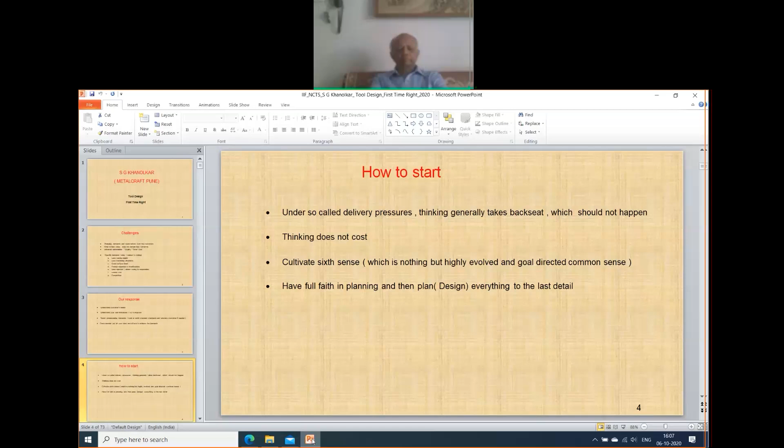Now we are talking about tooling design, first time right. Today, everybody's patience has become so thin that the moment you get the order, the customer wants the casting, and that too with all possible deliverables, that is in the fastest possible time, best possible quality, and least cost. How do we achieve this? We can achieve this only if we think before we act. What are the challenges involved in this?

Everybody knows universal deliverables are quality, time, and cost. I tell in our company, interdepartmentally also, every department has to take into account that whatever he delivers to his next processing agency, whether it is quality, whether it is delivered in time, and at what cost. Now, same applies to foundry tooling also.

If we look at the customers' demands on castings today, they want least possible weight for a given geometry, minimum possible machining allowance, excellent surface finish, prompt response to modifications, less rejections or no rejection, and of course less cost.

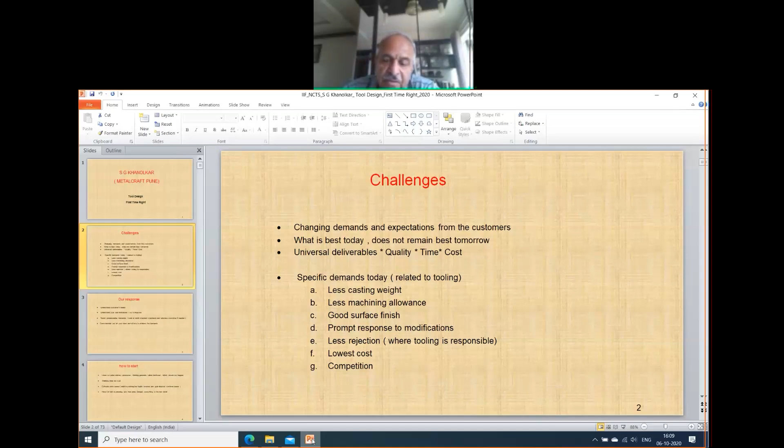Today, all three deliverables are needed simultaneously, which makes it more important to do everything right for the first time. What should be our response when the customer, management, individuals, or the organization want something right for the first time? Our response should be to understand the customer's needs.

Customers spell out their requirements through their drawings, through their dimensional or volumetric requirements, through their 3D models, through various documents, through various standards drafted by such companies. Many times I've seen people making a pattern halfway through and then receiving some standard document drafted by a big American or European company, and then everybody starts trying to understand what that document means. So it's very important to understand customers' needs before we really start to work.

It's also more important to understand our own limitations. There's no point in having dreams of reaching the moon even before we start using automobiles.

Resist unreasonable demands. The drawings and customers can ask for anything, but the foundry has to really understand and assess what is possible at their end, what is possible at any foundry's end, and then insist on removing the unreasonable demands.

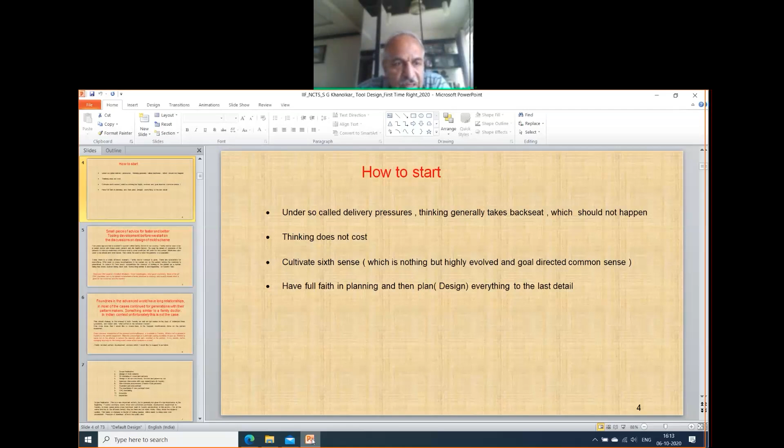Have full faith in planning and then plan everything to the last detail. Before we go to the theoretical part of my presentation, let me give you a small piece of advice for faster and better tooling development before we start on the discussions on design of mold scheme.

Mold scheme, if properly designed, will ensure in most of the cases you deliver the right product right the first time. Few years ago, we had a wonderful system called family doctors in our country.

Family doctor used to be a senior doctor who knew every patient and his health history. He used to be aware of response of his patients to various medications and knew exactly what medicine will work for his patient. Medicines also used to be simple and time tested. Very rarely, he used to refer his patients to a specialist.

Today, there is a totally different scenario. Family doctor concept is gone. There are specialists for everything who need so many investigations to be carried out on the patient before the medicine is prescribed. In today's high-tech world, somewhere the concept of looking at the patient as a human being has slowly started taking a backseat.

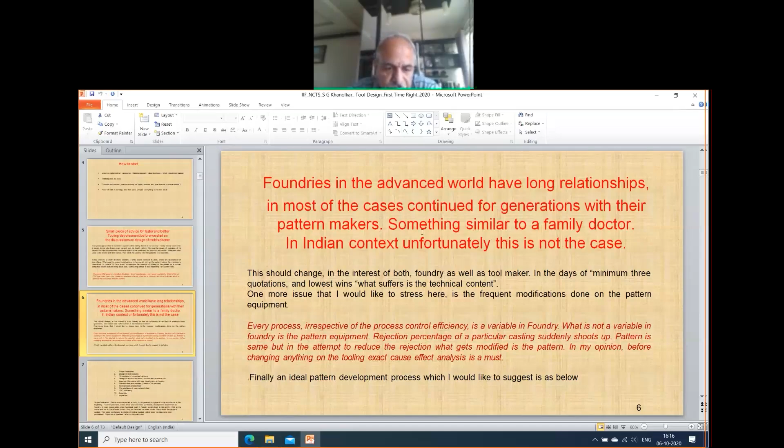Finally, an ideal pattern development process which I would like to suggest is as below. So, as I mentioned briefly in my last lecture, the process or the number of steps should be like scope finalization, where we understand our own limitations, we understand customers' requirements, and then decide about the scope, what will be delivered and how. Then starts the design of mold scheme.

Once it is over, 3D modeling, of course, is now a much easier task as compared to what we used to do in earlier days. Then design of actual core boxes, fixtures, patterns. At this, the next point is approval and discussions with user departments in Foundry.

I would say that this is the most important point because this brings everybody on board. If all such designs are discussed with users or at least user department heads, then the reservations, if any, are brought forward right in the beginning, and it's much easier to make the tooling acceptable or liked by the user departments. Then raw material procurement, standard part procurement, pre-machining, CNC machining, assembly and inspection.

Let us talk about scope finalization. This is a very important activity, but is generally not given its due importance in the beginning. Foundry purchase, sometimes end customers purchaser, development department in Foundry. In many cases, entire cross-functional team in Foundry are involved in this activity.

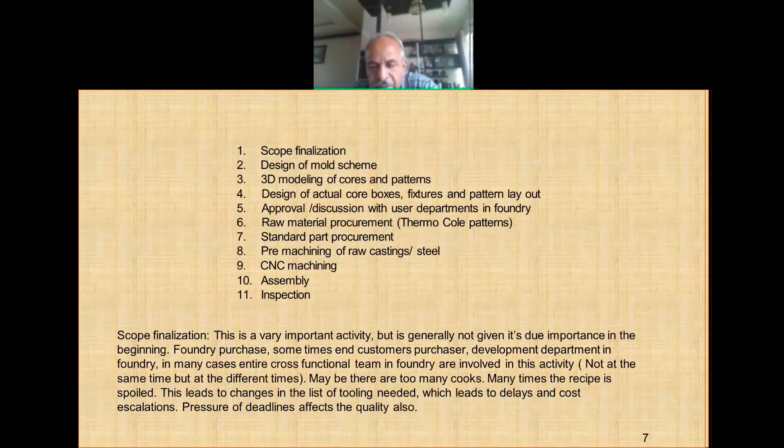Unfortunately, my observation is not at the same time, but at different times. Maybe there are too many cooks. Many times the recipe is spoiled. This leads to changes in the list of tooling needed, which leads to delays and cost escalations. Pressures of deadlines affects the quality also.

So we have to take into account all these issues and then proceed. First, make a list of tooling: correct definition of tool material, number of cavities, how many we would like to produce from our mold, and what combination of cores in the core boxes.

While deciding this, one has to take into account core flow in the core shop. If there are any assembly cores, they should be produced near the main core so that getting it there and testing it is much easier. Also consider availability of core shooters and their capacity.

Review of special casting tolerances and special gauging needed to achieve them. Small effort in the beginning to decide the exact scope of tooling will lead to macro benefits in the overall tool life cycle. It must involve all concerned, including production departments, from the beginning.

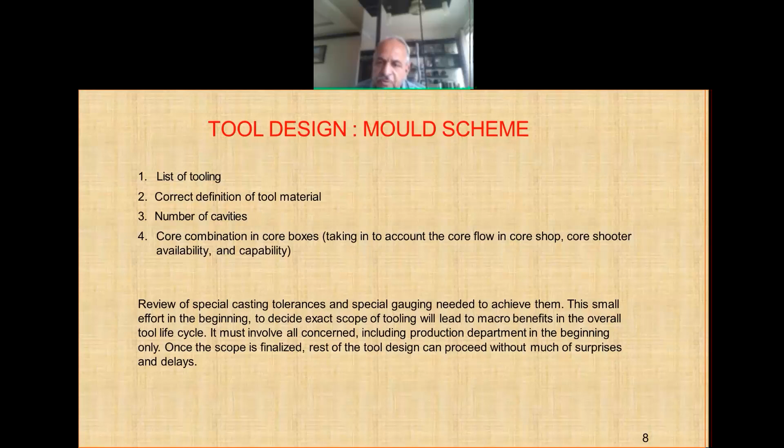Once the scope is finalized, the rest of the tool design can proceed without much surprises and delays. Once this document is finalized, it can be given to any tool maker, machinist, or machining expert, where the foundry's active interaction may not be necessary.

Now let us talk about mold scheme in detail. Mold scheme is a document which outlines how a casting is processed in foundry. It also acts as a starting point in the tooling development cycle. It is a bridge between foundry and pattern maker.

The objective of mold scheme, in simple words, is to produce a good casting in the most economic way. Mold scheme designer requires thorough knowledge of practices followed in the foundry for which the tooling is to be manufactured. It also means that a good mold scheme for foundry A may not be as good for foundry B.

So there's no point in copying what somebody else has done, or taking somebody else's tooling and trying to produce the casting in a different foundry. If at a mold scheme design stage all areas related to casting making are properly addressed, it saves a lot of trial and error type of rework at a later stage.

As mold scheme is also a form of tooling, all basic principles applicable to any good tooling apply to mold scheme, in addition to foundry specific considerations. Most of the activities in engineering industries, such as machining or assembly, involve much less variables as compared to variables involved in foundry. Considerations that should go into design of a mold scheme can be classified into following groups.

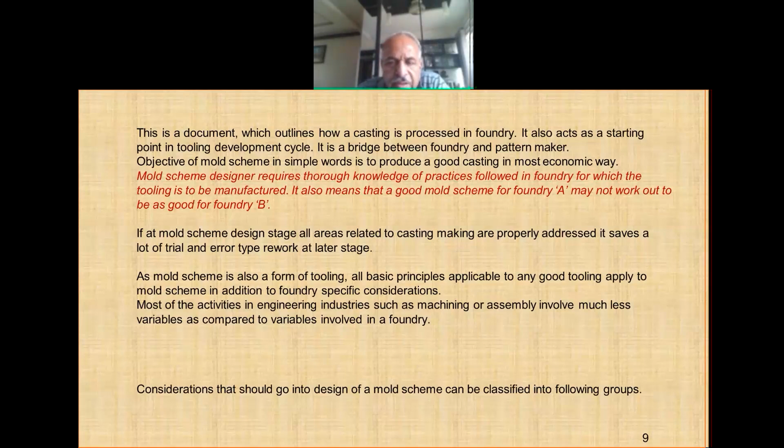Many big companies have their own standards, and these standards are generally derived from, or are derivatives of, ISO 8062, which serves as a guide to supply and acceptance norms of the casting.

The tolerance achievable on a dimension is a function of the foundry process and that dimension itself. A smaller dimension will have much less tolerance compared to a large dimension. A casting made in hand molding type of setup will have a different standard of casting acceptance as compared to a high pressure molding line.

Common understanding and proper interpretation of these standards is very important, and it should be arrived at in the beginning. Here, there has to be insistence from the mold scheme designer on the purchase department that acceptance standards of the customer, along with the customer's drawing, should be made available. In fact, I would suggest that before accepting any order from any customer, these standards must be thoroughly understood and studied.

If demand from the customer exceeds tolerances achievable as mentioned in the standards, additional in-process checks might be needed to control the normal process variation. These checks may be in the form of additional core assembly fixtures, templates, gauges to check particular dimensions, special care in fettling, and additional casting checking fixtures.

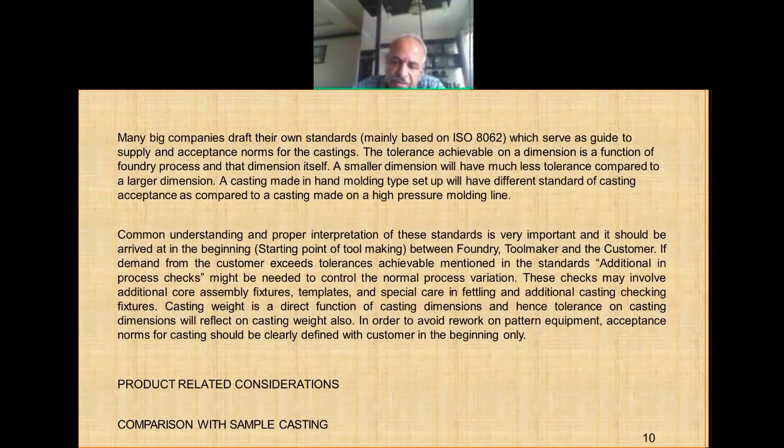Sample casting is a great information source, and it must be referred to before starting mold scheme design. All possible attempts should be made to get the sample casting if it is available, as it is an important source of information.

Sample casting in most of the cases gives vital clues which help in taking the right decision the first time. However, one should not get over influenced by the sample casting, and must use observations made on the sample casting in relation to the foundry under consideration. What to look for in sample casting?

My experience of almost 40 years says that sample castings are generally demanded, but they never arrive in time. They arrive after half the mold scheme methoding design is over, and then translating inputs received from the sample casting into tooling or methoding becomes a very time consuming and difficult task.

What to look for in a sample casting? Any additional features on the casting which are not there on the drawing. This has happened in my experience even with very advanced multinational companies, where the drawing shows something, the 3D model is different, and the actual casting being produced is different.

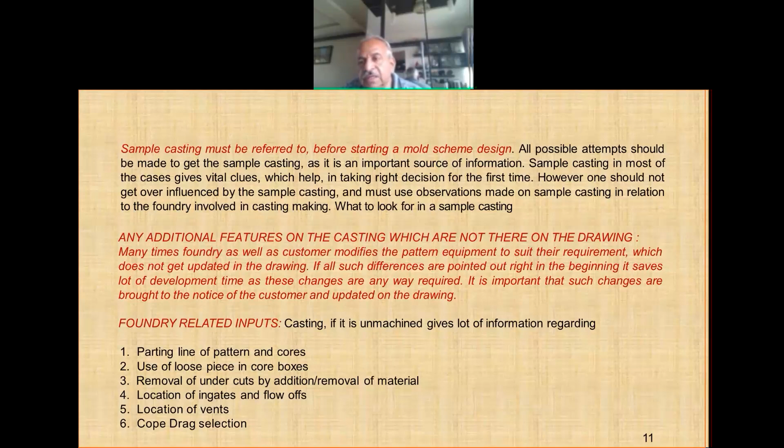Then comes cope and drag selection. The casting gives you a clear indication of which cope was considered earlier, and then we can debate whether we should retain that or go for a different system.

Extra material in features such as general wall, bosses, and so on - extra material is like an insurance policy, although it adds weight to the pattern equipment to a serious extent. If you have a sample casting, you can identify and define the extra material observed, and the same can be communicated to the customer and regularized.

Various logos and identification marks, their location, use of chills, chaplets, and actual dimensions achieved against tolerated dimensions on the drawing - the drawing says something, but the actual dimension is different. Such experiences need not occur after the casting is made; you can always compare and get some idea before we make the tooling.

Casting weight is a very important factor we get from a sample casting, along with what machining allowances are actually being used by the customer's machining setup.

These observations are only guidelines. I don't expect people to go and fight with the customer saying that since your sample casting is like this, my casting also has to be like that. But this is a guideline, based on which we judge whether we can improve, whether we cannot improve, or if we will be happy achieving that.

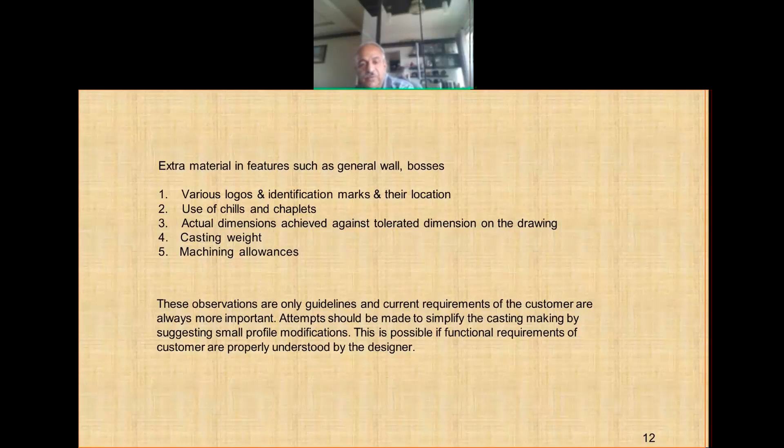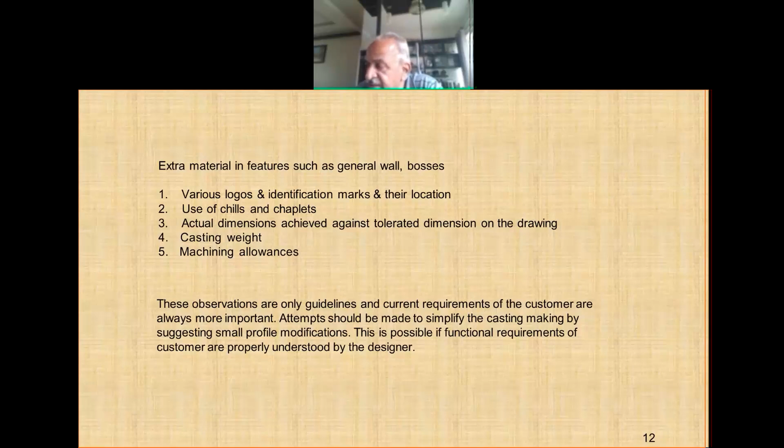Attempts should be made to simplify casting making by suggesting small profile modifications. This is possible if the functional requirements of the customer are properly understood. These small changes, if suggested initially, can eliminate a few slides and couple of cores, resulting in huge savings and great simplification of the entire casting making process.

Now let us talk about machining allowances. In today's competitive market, the foundry is always pressed for castings with minimum machining allowances and minimum finished part weight. While deciding machining allowances, customer's concurrence at the starting of model making is always advisable, as it reduces possibilities of rework on the equipment after samples are submitted.

Draft angles play a major role in increasing machining allowances, as machining allowance is being formed by a draw face. In order to keep machining allowance within acceptable limits, draft angle needs to be reduced, particularly on faces which are more in height. But as chances of mold breakage also increase with deep drawn faces with low draft angles, due consideration should be given to mold making also.

Many times it happens that the customer insists on half a degree draft angle just to reduce machining allowance, and the tool maker ends up giving that half degree. While making a mold, you either get a porous mold, a mold not compacted very properly, or sand fusion, and you end up with more machining allowance or more problems during machining. However, without customer's prior knowledge, machining allowance should not exceed 6 mm in any case.

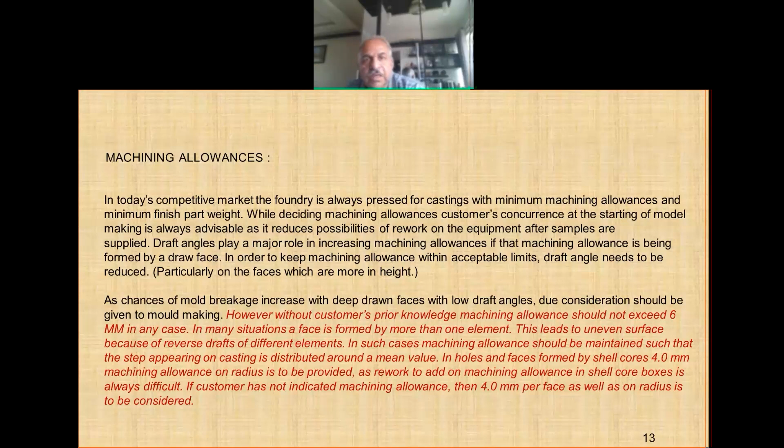Initial reference points for machining - this is what one should look at when you get a sample casting. These points should be identified and highlighted on the component drawing. These points, which are generally 3-2-1 type - that is a modern way of machining the casting - should not have any extra material and have minimum possible draft angle.

Extra material on the casting: although extra material or extra wall thickness means extra casting weight and hence loss to the foundry and in turn to the customer, it helps foundry to counter process variation. General wall thickness of the casting should be aimed at the mean of the upper tolerance.

If wall thickness specified on the drawing is 6 plus 1.2 minus 0.5 as an example, then pattern equipment should be aimed at 6.6 millimeters. The added 0.6 acts as a safety factor against process variation. If the casting drawing does not indicate any tolerance, then 0.5 millimeter extra material is to be considered from the pattern side.

In addition to general wall thickness, extra material is desired in following areas. A big exercise we conducted with Mahindra designers and with people in Tata Motors was on what should be the diameters of the bosses in cores as well as on pattern, cylindrical bosses or spherical bosses. Then we arrived at the following guidelines.

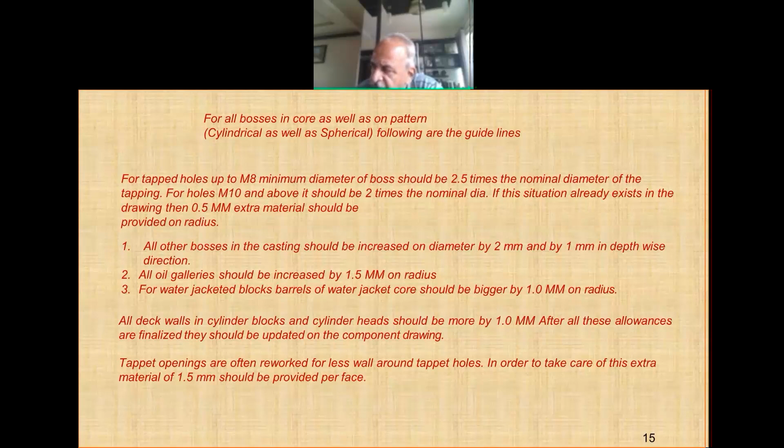I'd like to mention an experience we had with Nissan Diesel, a Volvo Group company, and Volvo's BS6 engine was designed by those people. When we first went there to develop their engine blocks, nobody was ready to agree that over and above the casting drawing or 3D model given for the product, some material is added by the tool maker. Nobody was ready to accept or regularize that. We had a meeting with their foundry in Japan, and when we listed all these points I have listed now, they virtually agreed to every point that we mentioned.

So these are the practices followed world over. But if we are not aware of these practices and try to do something, then instead of doing it right the first time, it becomes something that definitely needs corrections. Whatever additional materials I talked about in my previous slide, this practice is generally accepted by customers in the tractor and truck industry. But one has to be more careful while dealing with castings for cars. In all such cases where the requirement is very critical about casting weight and machining allowances, extra material policy should be finalized and documented in consultation with customers and foundry.

Customer drawing, thus modified, should then be converted into reproducible format such as CAD data or a tracing sheet. A copy of this drawing should be sent to the foundry highlighting the changes made. Extra material here, I'm mentioning if the toolmaker is adding it. If the foundry is doing it, they already have this information.

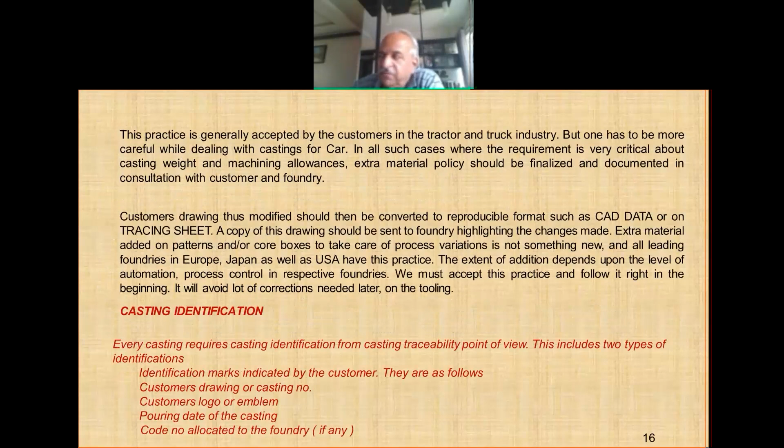Let us talk about casting identification. This is something even customers and designers forget to mention on the drawing, and then somebody looks at the sample casting and realizes there is ISO, there are so many standards, and traceability and identification are important considerations. Then everybody starts running after it.

Customers have some specific logos, but those logos don't have drawings. They need to have the 3D models of those logos. So all this has to be identified and the information should be collected before we start.

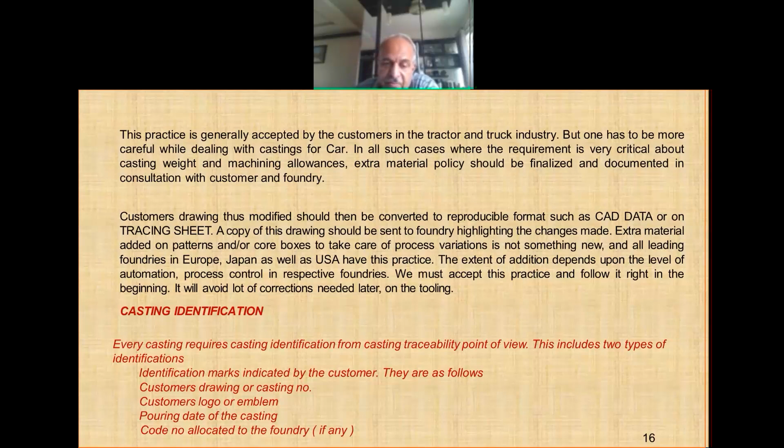Every casting requires casting identification from a casting traceability point of view. This includes two types of identifications. Identification marks indicated by the customer are as follows: customer drawing or casting number, customer's logo and emblem, pouring date of the casting, and code numbers allocated to the foundries.

Generally this information is shown on the component drawing, but many times it calls for a standard drawing made by the customer. If the customer has not given these drawings, then a follow-up is required with the customer. This saves a lot of running around when the pattern is ready. If the location of these identifications is not clearly indicated on the drawing, clarification should be obtained from the customer, as in many cases these positions are important from a visibility point of view after the casting is assembled onto the vehicle.

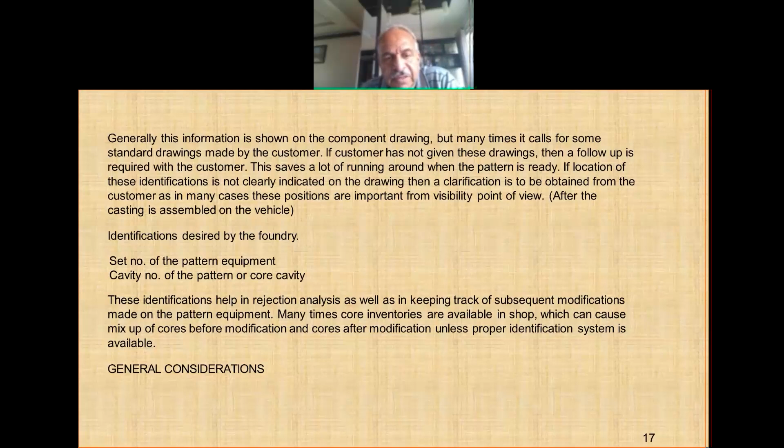Identifications desired by foundry: in addition to the identifications demanded by the customer, foundry needs for their own internal traceability the set number of the pattern equipment and the cavity numbers if there are multi-cavity patterns. These identifications help in rejection analysis as well as keeping track of subsequent modifications made on the pattern equipment. Many times core inventories are available in the shop, which can cause mix-up of cores before modification and cores after modification unless a proper identification system is available.

Then let us talk about general considerations.

These are important considerations specific to the foundry under consideration, which may vary from foundry to foundry.

One is deliberate fin. Fin is desired on the equipment where more than one element, such as mold or core, or two different cores, or two cores and mold meet. There is generally a sharp meeting of two or three sharp corners of different elements, particularly in the casting area.

Fin helps in avoiding sand inclusion at sharp junctions in the casting, which creates hard spots because of heat spot and then sand fusion at that particular location, resulting into hard spots which affect cutting tool life in the machine shop. It also helps reduce sand drop while core placing and core box closing.

Care should be taken in providing fin as it reduces core resting and butting area. Somebody has said core fin is good and there is small print touching another core, but if we provide a generous fin, then core resting gets reduced. So that also has to be well balanced.

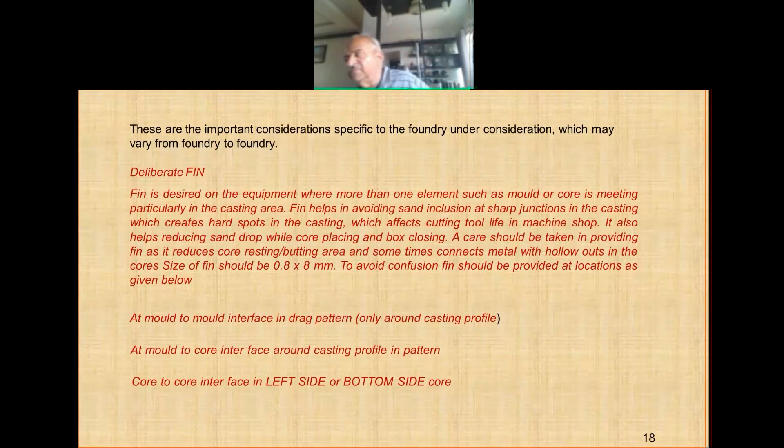A foundry should decide their own practice and say, at mold to mold interface, we will provide fin in drag only. Because if you end up providing fin on both elements, you double the thickness of fin and then it is difficult to settle. At mold to core interface, fin is provided around the casting profile in the pattern.

Core to core interface fin is provided on the left side or bottom side of the core. You can decide any of these guidelines, but these guidelines must be followed everywhere.

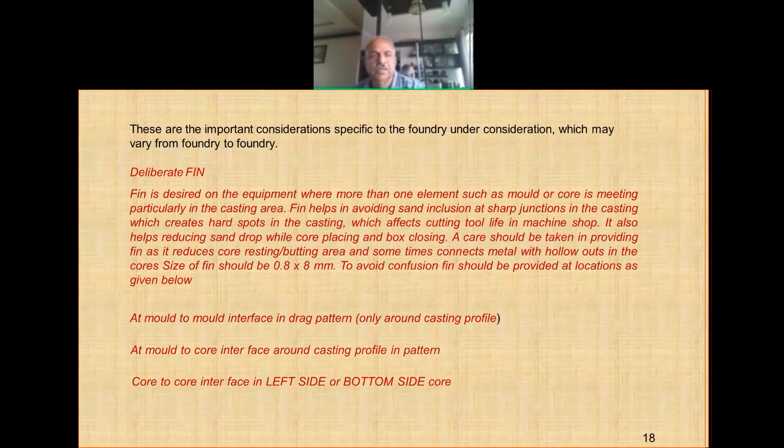Then there is sand cord. Sand collecting cavity is provided on drag mold to collect the loose sand which falls while setting the core in the mold, because of rubbing of core with the mold walls. This cavity collects sand which otherwise would fall on the resting area of the core, resulting in high setting of the core.

This is called the sand cord of the pattern, which is generally 5 mm wide and 2.5 mm in height. Although sand cord helps in core setting, it is likely to connect the metal with the hollow-outs in the core, resulting in mold leakage.

In order to avoid this, sand cord should start from 15 millimeters away from the casting, so there are no direct linkages or leakages that can happen from the casting metal to the hollow-outs in the cores. Crush groove: clearances are provided in the pattern equipment to take care of process variations.

If the clearance is enough for metal to leak through the mold, leakage takes place. If clearance cannot be reduced further, then a crush groove of 2mm, a 90-degree V-shaped crush groove, is provided on the print area near hollow-outs in the pattern, so that the green sand is crushed there and it seals the passage. Generally, it is provided in the cope pattern.

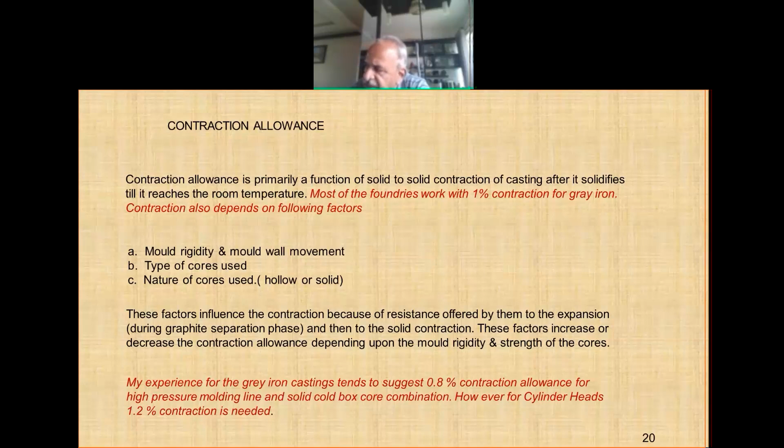Contraction also depends on the following factors: rigidity of the mold and mold wall movement, types of cores used, and the nature of cores used - hollow or solid, shell or cold box. These factors influence the contraction because of resistance offered by them to the expansion during the graphite separation phase and then to the solid contraction. These factors increase or decrease the contraction allowance depending upon the mold rigidity and the strength of the cores.

My experience for gray cast iron suggests 0.8% contraction allowance for high pressure molding line and solid cold box core box combination. However, for cylinder heads, 1.2% or slightly higher contraction allowance is needed.

Whatever I'm saying might look a little too theoretical for somebody, but for those who have worked in the methoding section, or who have been doing methoding jobs, they will understand better.

Core prints - let us talk about core prints. Core prints are the connection between core and mold. That is where the product designer allows the foundry engineer to rest his cores into the mold. Each opening in the casting can be used as a core print.

Openings in the castings are provided for the following reasons by the product designer: functional requirement of the casting - the casting needs that opening; then access for sand removal during fettling; and then core resting and location in the mold.

Openings in the casting can serve one or more functions together. These openings are important considerations in mold scheme design. These openings open into prints. Prints should be of geometric nature as far as possible.

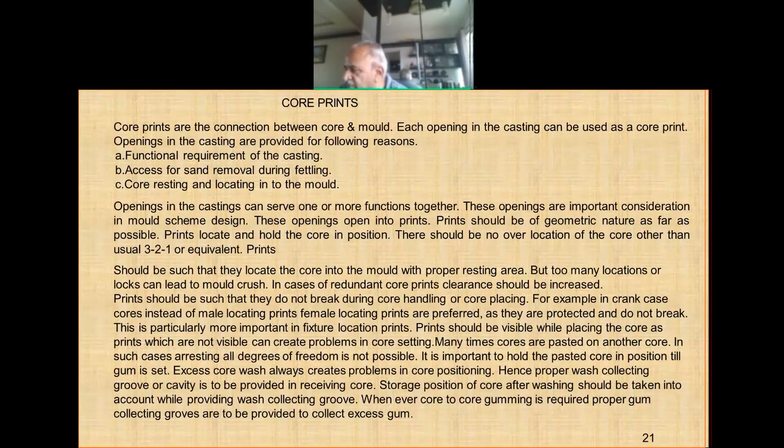Prints should be visible while placing the core, as prints which are not visible can create problems in core setting. Many times some cores are pasted on another core. In such cases, arresting all degrees of freedom is not possible. It is important to hold the pasted core in position till the gum is set.

Excess core wash always creates problems in core position. Hence, proper wash collecting groove or cavity needs to be provided in receiving cores. Storage position of core after washing should be taken into account while providing wash collecting grooves. Whenever core to core gumming is required, proper gum collecting grooves also need to be provided.

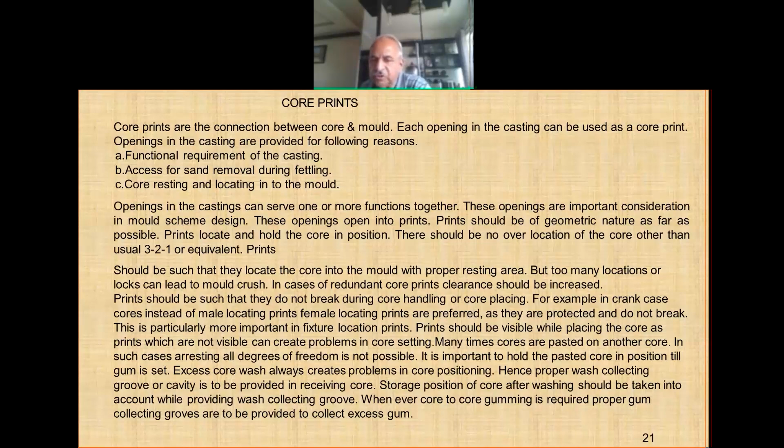Now let us talk about print clearances. Clearances are decided based on the following considerations. One, reliability of core and mold making. Only because we want very accurate casting to be produced, if we reduce print clearances and our core making is not reliable, or the mold making is not proper, then there is no point in tightening the clearances without really understanding this. Core placing accuracy, manual or with fixture.

If it is manual core placing, then clearances should be a little higher. With fixture, you can go for tighter clearances. Function of the core print, whether it has been provided to locate the core, or just for removing the sand, or it is a functional requirement of the casting, will dictate what kind of clearances should be provided. Then the size of the pattern will also decide. If it is a 3 meter long casting, naturally we won't expect 0.5 millimeter of clearance on the sides, and then the accuracy required on the casting.

For mold schemes for high pressure molding and machine mounted core boxes, the following guidelines are to be used. Clearances should not be tight unless they are locating the core. For core to mold clearances, for drag mold: 0.2 mm in core resting direction, 0.5 mm in sidewise direction. Cope mold: 0.8 mm in sidewise direction and 0.5 mm in heightwise direction.

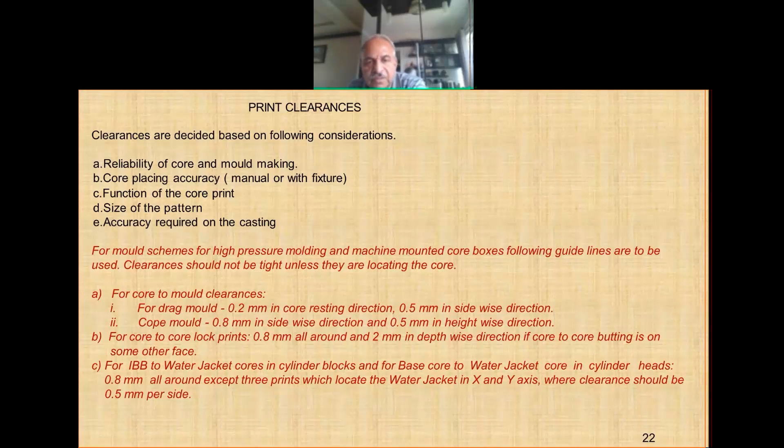For core to core lock prints, 0.8 mm all around and 2 mm in depthwise direction if core to core butting is on some other face. For IBB and water jacket cores in cylinder blocks, and for base core and water jacket core in cylinder heads, 0.8 mm all over, except 3 prints which locate the water jacket in X and Y axis, where clearance should be 0.5 mm. When I say all this, a proper consideration of washing practices—whether cores are painted after assembly or painted before assembly and then pasted—will have an implication or relation with the clearance to be provided.

In resting areas of water jacket cores, it is preferred that a grinding operation is introduced with 0.2 mm clearance at base, since a unique plane can pass through 3 points. Other prints should be provided with 2 mm clearance from the base core. Circular print, mold to core: 0.3 mm in drag mold all around and 0.5 mm in cope mold all around. In cases such as crankcases, butting faces of cores should have 0.2 mm per side clearance where many cores are placed in line, just to eliminate the cumulative error.

One more important consideration in deciding the clearance is the core wash. If the core wash is expected to be there on core locating prints—which is not desired as it reduces core permeability and tends to increase casting defects—then clearance should be increased by a corresponding amount, normally 0.2 mm. All attempts should be made in the foundry to keep wash thickness at the designed value by controlling the washing process parameters. Care should also be taken to ensure that the vent holes do not get blocked by the paint.

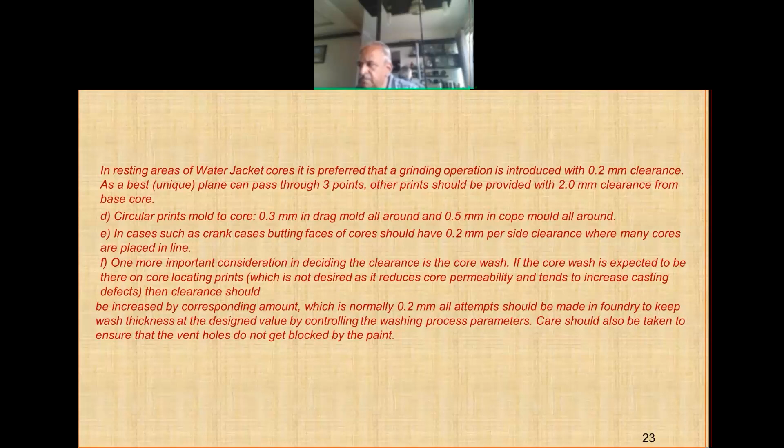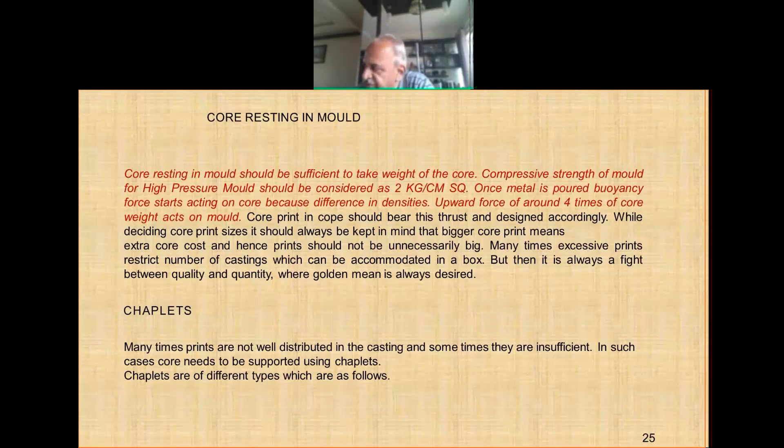Many times prints are not well distributed in the casting, and sometimes they are insufficient. In such cases, the core needs to be supported using chaplets.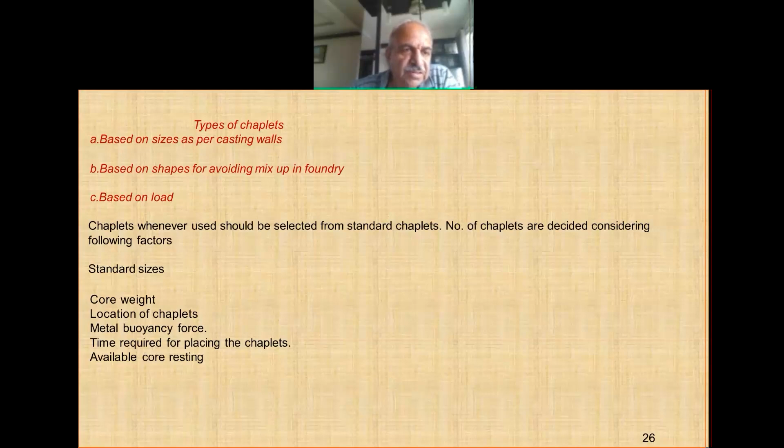Chaplets are of different types, and they are classified based on sizes as per casting walls - 8 mm, 6 mm, 10 mm - and based on shapes, to avoid mix-up in the foundry. So it's a good idea to have a 6 mm chaplet round, and an 8 mm chaplet rectangular, so that by mistake wrong chaplets will not be used. And based on the load, there are heavy duty chaplets, normal chaplets, and so on.

Chaplets, whenever used, should be selected from standard chaplets. Number of chaplets are decided considering the following factors: standard sizes, of course, is the main consideration, then weight of the core, location of chaplets, metal buoyancy force, time required for placing the chaplets, and available core resting.

For deciding the number of chaplets, the following method is to be used. Unsupported load of the core is equal to core buoyancy minus core print support. Core buoyancy is 4 times the core weight. Print support is print area into strength of mold, that is 2 kg per mm square. So 4 times core weight should be less than or equal to 2 times print area plus total chaplet area.

Chaplet seats are provided on the drag pattern for mold-to-core chaplets, and in the cope half of the core box for chaplets between core and cope.

Chaplet seat should be 4 mm bigger in diameter, and height of chaplet seat should be decided so as to enable use of standard chaplet. So if your casting wall is 9.5, 10 mm, or 11 mm chaplet is available, accordingly a depression can be made in core so that standard chaplet can be used.

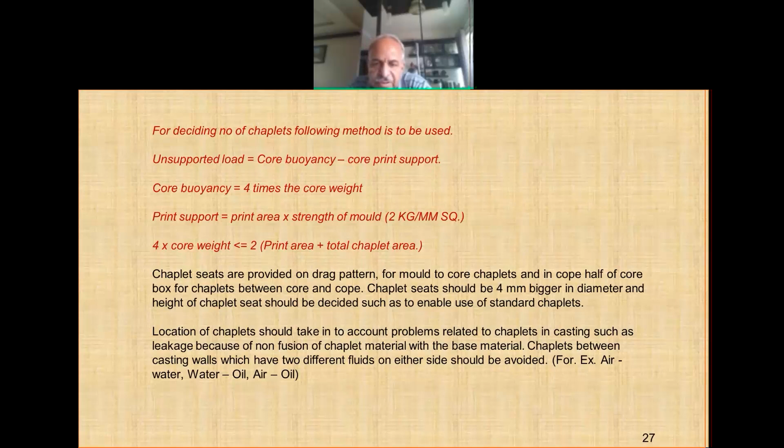Location of chaplet should take into account problems related to chaplets in casting, such as leakage because of non-fusion of chaplet material with the base material. Chaplet between casting walls which have two different fluids on either side in the ultimate final casting should be avoided. For example, if there is an air passage and a water or oil passage, as far as possible we should avoid chaplets between two such passages, so that the chaplets are not fused properly and air doesn't leak into water or water doesn't leak into air.

Cope and drag selection. How do we select cope and drag? This is an extremely important consideration and needs study of casting drawing from all possible angles. Most of the time, geometry of the casting itself decides the cope drag selection because of core openings. In such cases, selection of cope drag is much easier because there's only one way how you can select cope and drag, because the prints are given that way. Core placement is possible only if cope drag is selected in a particular way. If core prints allow cope and drag in either direction, then other considerations become more important.

Machining reference points in drag. Many customers machine their castings by taking direct reference from the as-cast surfaces on the casting. If these reference points are coming from the pattern side, it is desirable to have them in drag. Generally, surfaces produced in drag are smooth and without casting defects. In cope, there is also a possibility of a vent pin or a flow off coming in or near the reference points, which is likely to cause fettling variations besides other defects.

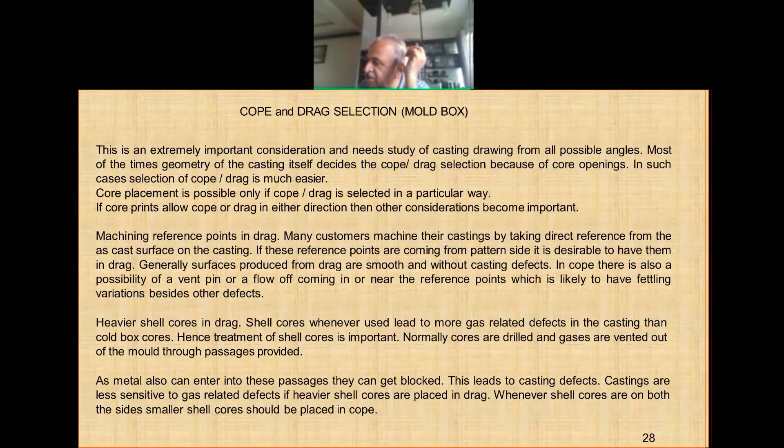Heavier shell cores in drag. Shell cores, whenever used, particularly in case of cylinder blocks, you will observe this - there are oil passages, there are water passages. So heavier shell cores, wherever they are there, should preferably go in drag. Shell cores, whenever used, lead to more gas-related defects in the casting than cold box cores. Hence, treatment of shell cores is important. Normally, cores are drilled and gases are vented out of the mold through the passages provided. As metal can also enter those passages, they can get blocked, which leads to casting defects. Castings are less sensitive to gas-related defects if heavier shell cores are placed in drag. Whenever shell cores are on both sides, smaller shell cores should be placed in cope.

Number of castings per mold. Attempt should always be made to maximize yield per mold, which should be more than 150 kg. I am just giving a rough guideline for a 1200 by 900 box size. However, liquid metal to sand weight ratio should not be less than 1:4.

For a multi-cavity layout, minimum mold wall between cavities becomes an important consideration. Normally, the following considerations are made in designing mold wall, from mold making and in-mold leakage point of view. Cavity to cavity should be 50 mm. If a runner bar is passing in between, then at least 35 mm should be left between casting and runner bar. If cavity is deep and distance between cavities is limited, then the runner bar can be split in half cope, half drag - so you reduce the height of the runner, and that may help in bringing the casting a little closer.

Edge of the box to casting, minimum 55 millimeters. Edge of the box to core print, minimum 40 millimeters. For all borderline cases, like suppose we deviate this guideline by 10 millimeters and are able to accommodate more cavities, then these need to be discussed with foundry, molding, and related departments.

For a given box size, position of the sprue is also important, as the sprue cutting machine can approach only a specific area. Twin block type layouts increase the number of cavities per box, but they have problems associated with core storage and core handling, as on top as well as on bottom side of the core there is casting profile. These issues need to be discussed with foundry before taking a decision about the print sizes.

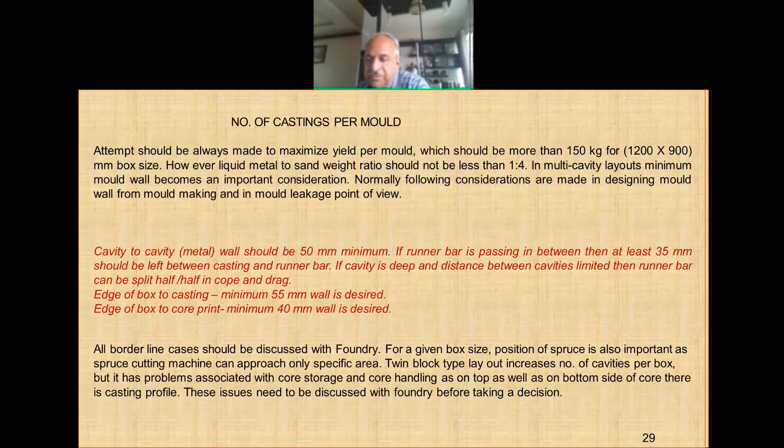Maximum number of cores per mold. Although the number of cores in a mold is primarily decided by the casting drawing, while doing multi-cavity layouts, the number of cores should not exceed 12, as it will result in core setting delays. As an alternative, special core setting aids or introducing core subassemblies should be thought of.

More than one casting in one layout. This was a theoretical question asked to me by somebody. It is desired that all castings made in one box should be of the same type. But if coreless castings of the same metal are available and space is also available, they can be accommodated in the same mold. So we can produce multiple castings.

Productivity of the core box is important, so the mold scheme design should also think of the plan size of the core box. Suppose by reducing a print by 10 millimeters I am able to make a 2-cavity core box, thereby increasing my core shooter productivity by more than 100%, it should be attempted.

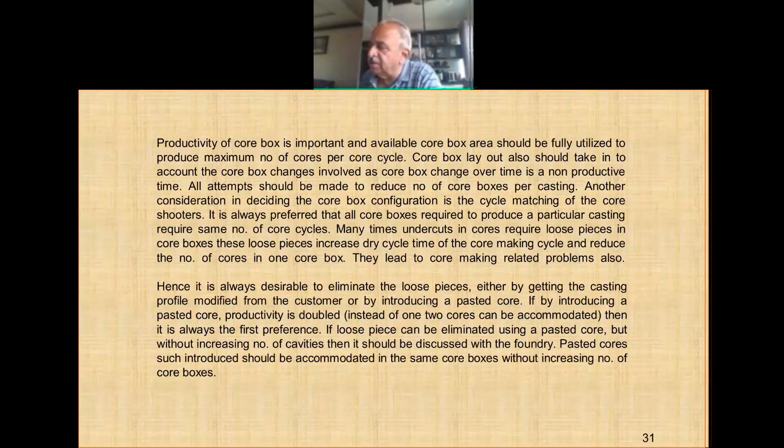If by introducing a pasted core productivity is doubled, instead of one, two cores can be accommodated, then it is always the first preference. If the loose piece can be eliminated using a pasted core but without increasing the number of cavities, then it should be discussed with the foundry. Pasted cores thus introduced should be accommodated in the same core box without increasing the number of core boxes.

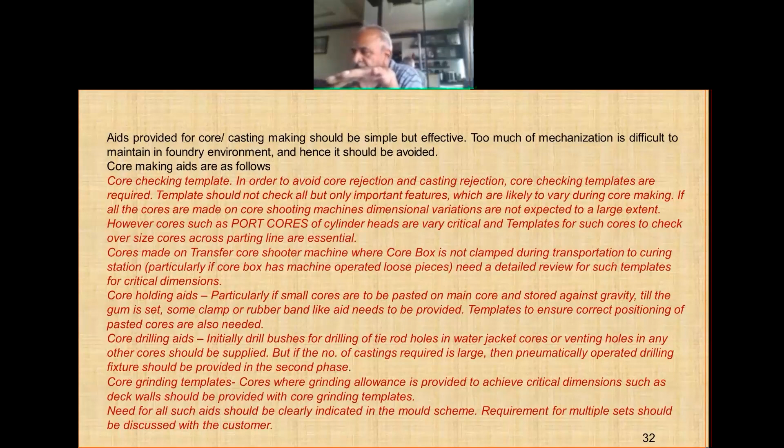Aids provided for casting making should be simple but effective. Too much mechanization is difficult to maintain in a foundry environment. It's not rocket science, and that kind of design doesn't work in foundry, and hence it should be avoided. Core making aids are as follows.

Core checking templates. In order to avoid core rejection and casting rejection, core checking templates are required. They are in-process gauges and should be rigorously followed. Templates should not check everything but only important features. What can vary in a core box when the cores are produced is the thickness of cores across the parting line, which is likely to vary during core making.

If all cores are made on core shooting machines, dimensional variations are not expected to a large extent. However, cores such as port cores of cylinder heads are very critical, and templates to check oversized cores across the parting line are extremely essential. Cores made on transfer core shooter machines, where the core box is not clamped during transportation to the curing station, particularly if the core box has machine-operated loose pieces, need a detailed review of such templates for critical dimensions.

Core holding aids: particularly if small cores are to be pasted on the main core and stored against gravity till the gum is set, some clamp or rubber band like aid needs to be provided. Templates to ensure correct positioning of pasted cores are also needed.

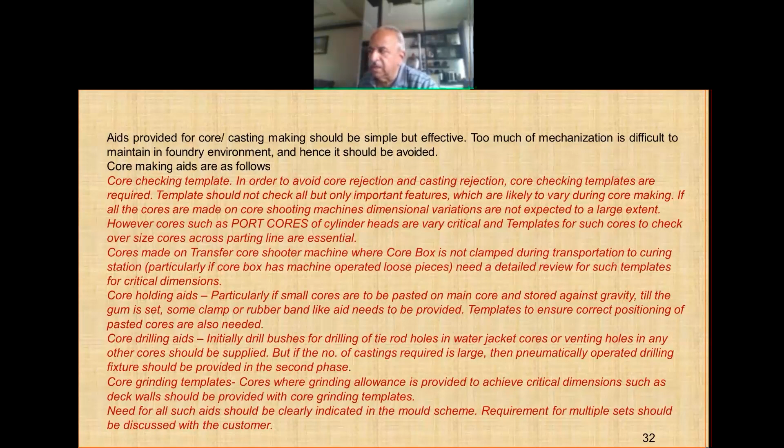Parting line of core should be as simple as possible, because it has to also take into account gas leakage, sealing of rubber sealing, and so many other issues.

It should be clearly represented in the mold scheme. The foundry designer should indicate what parting line he needs for the core and accordingly communicate it to the tool maker.

Parting line of cores, if correctly represented in mold scheme, helps in providing matching drafts. So later on, no surprises - extra machining, excess machining, less machining, or no machining.

It also helps in reducing compound angles in the core boxes, which are difficult to make as well as measure. Those pieces are also correctly identified, which helps in deciding core box combinations.

Sample casting should be referred to wherever possible for indications of such parting lines. Many times material addition because of draft angle becomes critical from casting, machining, and fouling point of view. It is extremely difficult to change parting line orientation once the tool is made.

Core resting: resting faces of the cores in mold as well as on trolley, that is in storage, is important. Both should not be the same, because the resting of the core in mold defines the quality of the casting or the dimensions of the casting.

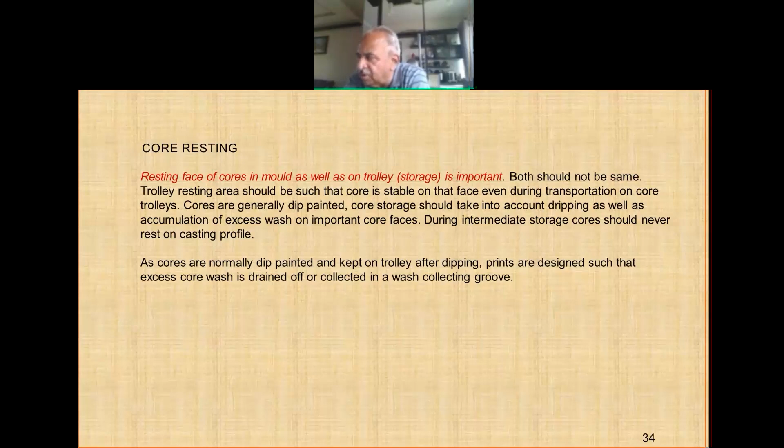Whereas storage prints just help the core to keep the core properly stored without damaging the profile part of it. Both should not be the same.

Trolley resting area should be such that core is stable on the face even during transportation on core trolleys. Cores are generally dip painted, so core storage should take into account dripping as well as accumulation of excess wash on important core faces. During intermediate storage, core should never rest on casting profile.

As cores are normally dip painted and kept on trolley after dipping, prints are designed such that the excess core wash is drained off or collected in a wash collecting groove.

Core location: locating of cores is important for dimensional accuracy of the casting. Core location in final core setting fixture - all possible degrees of freedom should be arrested while locating the core in fixture. It is also important that core is not over arrested in the fixture.

If cores are progressively assembled bottom up, only one core per independent core package should be located in all directions. Other cores, if arrested by locator core or main core, should then be located only in the other two directions. If cores are overlocated, it leads to core damage as well as incorrect positioning in the mold.

Core location in mold should also have similar consideration. However, if core package is heavy, around 100 kg, it takes the position dictated by the fixture. Mold cannot correct core package if it is wrongly placed by the fixture.

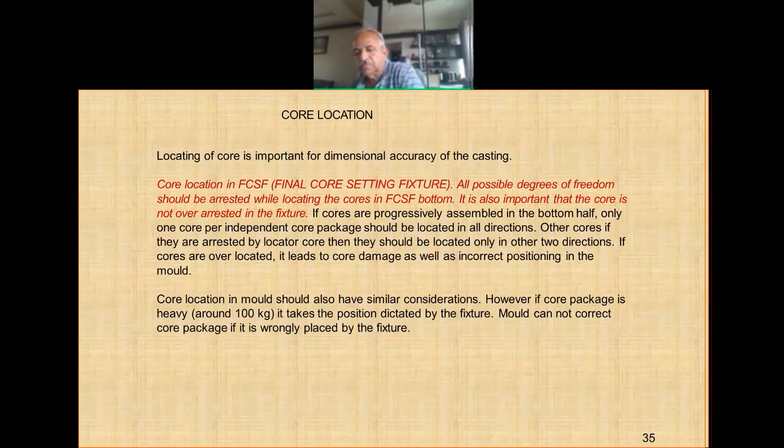Core handling: core is a delicate object for handling. It needs proper design consideration for providing core handling prints. Handling of core takes place at the following locations: while core making, while core washing and painting, then set making and assembly making, and on final core setting.

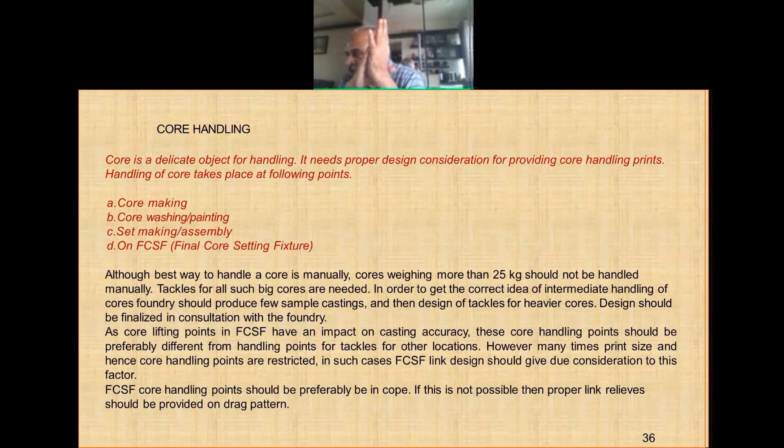Although best way to handle the cores is manually, like how human infants are handled, cores weighing more than 25 kg should not be handled manually. Tackles for all such big cores are needed.

In order to get the correct idea of intermediate handling of cores, foundry should produce a few sample castings, then design the tackles for heavier cores. Design should be finalized in consultation with the foundry.

As core lifting points in fixture have an impact on casting accuracy, these core handling points should preferably be different from handling points for tackles for other locations. However, many times print sizes, and hence core handling points, are restricted.

In such cases, fixture link design should give due consideration to this factor. Final core setting fixture core handling points should be preferably in cope. If this is not possible, then proper link reliefs should be provided in drag pattern.

Core hollowing is again a disputed issue. Core weight is an important consideration in costing of the casting. Hollow cores weigh less, and hence cost of sand and resin is less if cores are hollowed out.

Wall thickness of around 22 mm is desired to prevent core from deformation under metal pressure. Proper ribbing in cores is also desired if hollowouts are big. Openings of such hollowouts should be plugged using plug cores. Plug core should be common as far as possible and should be made from the same core box if possible.

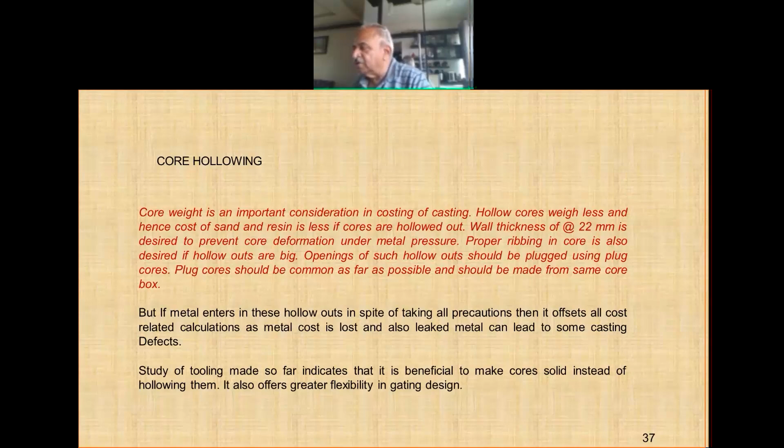Core fouling is sometimes experienced after the tooling is made. Many times the casting geometry dictates that cores should be placed in a particular order, as one core fouls with another while lowering into the mold. In such cases, core splitting becomes necessary: place half the core first, then the other core, then the remaining half. Alternatively, the core is lowered first at a distance and then laterally moved to its required position.

Extra clearance provided for lateral movement needs to be filled up by another wedge-type core. If the cores are being placed using a fixture, a movable trolley can be introduced into the fixture to take care of this problem.

Blow tips are required to blow sand into the core cavity. They come as projections on the core and need to be trimmed off to match the core profile. This calls for extra manpower and care in matching the profile. Hence, blow tips are preferably provided in the print area where matching with core prints can be avoided.

If corresponding relief is provided either in the pattern or in the receiving core.

Special consideration for blocks and heads, for those dealing in cylinder blocks and heads: port cores and their positioning in the final casting are considered very critical for meeting emission norms of engines, as insisted by product designers. This calls for additional precautions in tooling as well as in the foundry. All port cores have a tendency toward high seating or getting lifted.

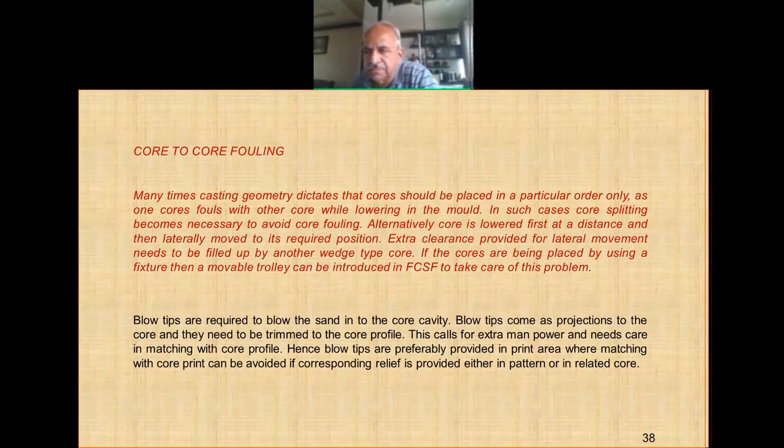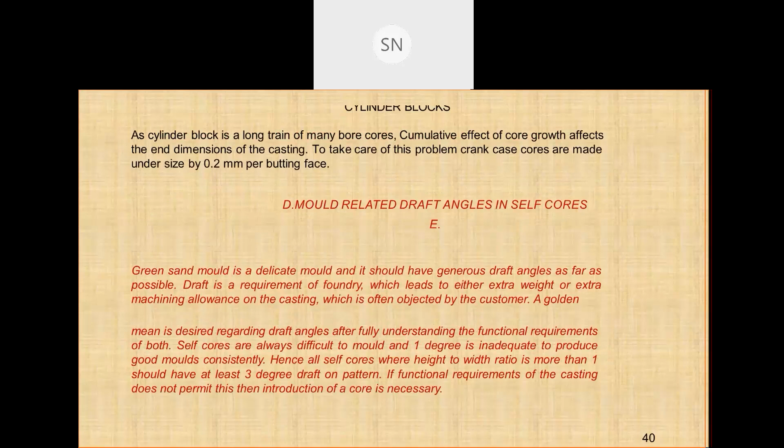Cylinder blocks: as a cylinder block is a long train of many bore cores, the cumulative effect of core growth affects the end dimensions of the casting. To take care of this problem, crankcase cores are made undersized by 0.2 millimeter per butting face.

Mold-related draft angles in self cores: greensand mold is a delicate mold and hence should have generous draft angles as far as possible. The draft angle required by the foundry leads to either extra weight or extra machining allowance on the casting, which is often objected to by the customer. A golden mean is desired regarding draft angles after fully understanding the functional requirements of both.

Self cores are always difficult to mold, and 1 degree is inadequate to produce a good mold consistently. Hence, all self cores where height-to-width ratio is more than 1 should have at least a 3-degree draft angle on the pattern. If functional requirements of the casting do not permit this, then introduction of a core becomes necessary.

Location of sprue: as sprue position is dependent on the travel of the sprue cutting machine and travel of the press pour, the coordinates of the sprue should always lie within those prescribed limits.

Parting line leakage: the mold wall towards edges should be sufficient to produce a good mold and prevent metal leakage from the cavity to outside the mold. Parting line leakage not only leads to casting rejection but also damages the mold boxes. If the end wall is less than 80 millimeters of sand-to-sand contact, a crush groove of 3 millimeter by 90 degrees should be provided in this area to avoid leakage.

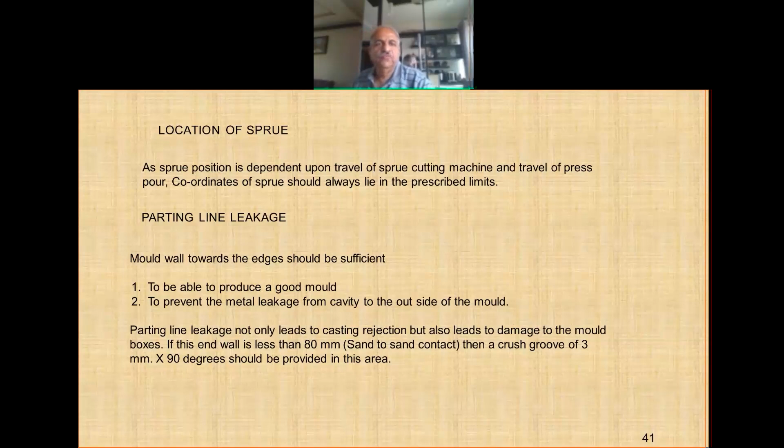Fettling-related consideration: parting line selection. Wherever two elements of the mold scheme meet, a fin is produced. It can be controlled if clearances are controlled.

In many situations where an as-cast hole is produced by two elements, a fin is produced at their interface. In these cases, care should be taken to part the profile such that it is easier to remove the fin and has a better approach. If such a fin is in an area that eventually gets machined, it need not be removed.

Location and size of the fin can influence fettling productivity. Male-female prints produce fins which are easier to fettle, whether horizontal fin or vertical fin.

Openings in the casting are normally used to provide core prints. If the opening is of complicated shape, then the print shape should be simplified, as it is easier to manufacture as well as to measure. While simplifying, these prints should be made bigger than the opening as far as possible.

This leads to a fin in the horizontal direction, normal to the casting, which can easily be chipped off. If the print is made smaller than the opening, it leads to a fin in the vertical direction, which is difficult to chip off, and casting damage is likely to occur while doing so.

Thickness of the fin in this case is also more, and there is a possibility of core rubbing with the vertical mold wall. Chipping of the vertical fin at times leads to casting rejection because of a crack on the casting during hammering of the fin.

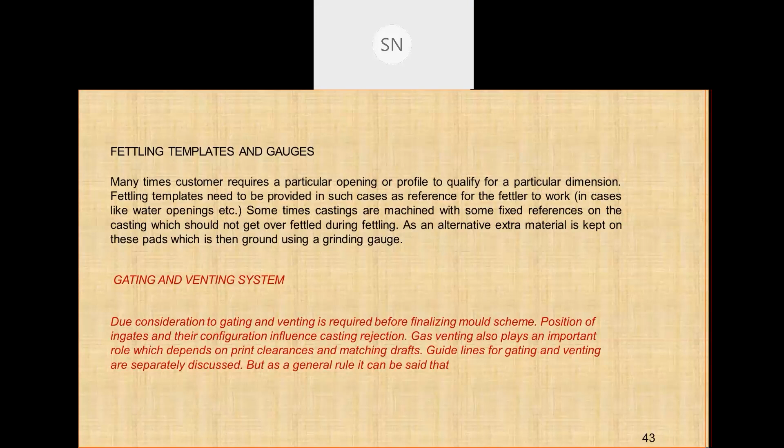Due consideration to gating and venting is required before finalizing the mold scheme. Position of ingates and their configuration influence casting rejection. Gas venting also plays an important role, which depends on print clearances and matching drafts.

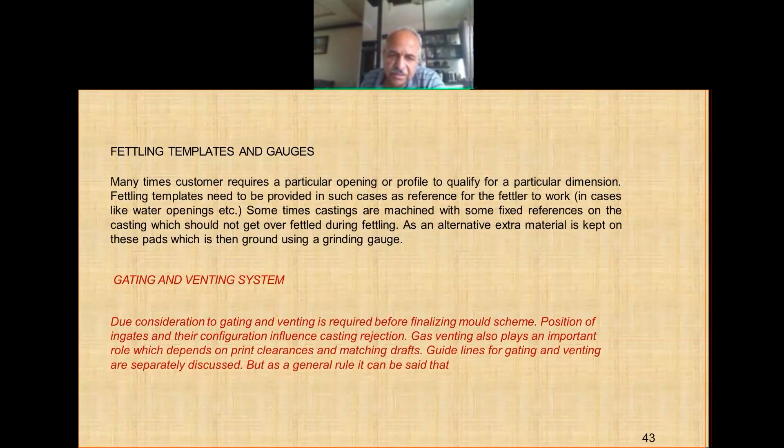Guidelines for gating and venting are separately discussed, but as a general rule it can be said that metal should enter the mold as smoothly as possible. That is called laminar flow.

Air in the mold and gases generated during burning of the core resin should be adequately evacuated to avoid their entrapment with the metal. Metal velocity in the mold should not exceed around 80 centimeters per second.

In-gate position should be selected such that there is even temperature distribution of liquid metal in the mold. Temperature variation in the cavity should be minimum possible.

Metal should not enter gas or air passages, and gas should not enter the metal passages. They should be properly isolated. Avoid sharp bends in gating systems. Ensure that the metal stream does not hit the core directly.

General idea of metal running should be finalized right in the beginning in order to avoid major changes in prints later on. Need of plug cores/crush grooves largely depends on the path of metal.

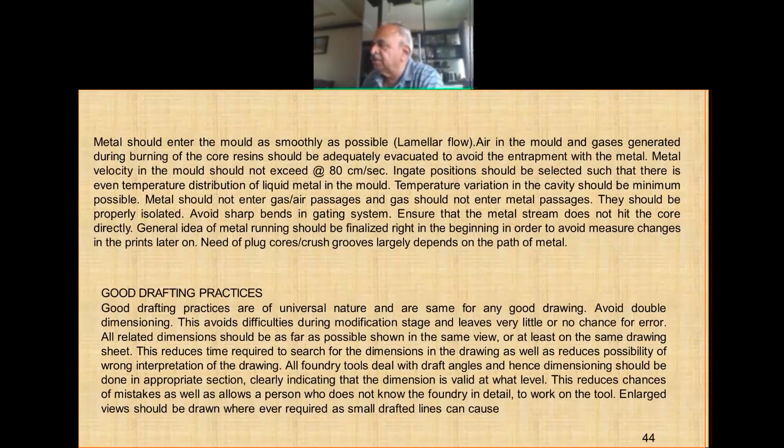Confusion leading to dimensions being considered at the wrong location. Generally, if you refer to the 2D drawing, dimensions are placed in the plan area, but that doesn't really specify whether that dimension is required at the top or the bottom.

The toolmaker, as a matter of practice, considers every dimension given at the top of the pattern and then adds draft just to add material. So this confusion leading to dimensions being considered at the wrong location needs to be settled in the beginning.

Adequate number of sections should always be drawn to give the required clarity. This, of course, applies more to the product designer.

All information related to casting making should be given in the drawing of the mold scheme. So the mold scheme should summarize what all thought process has gone into this design, as it is the document which starts many parallel tool making activities, and it is the drawing which is frequently referred to in the foundry.

This information is as follows: names and numbers of cores required, estimated weights of the cores, process to produce these cores, machines to produce these cores, production aids if used.

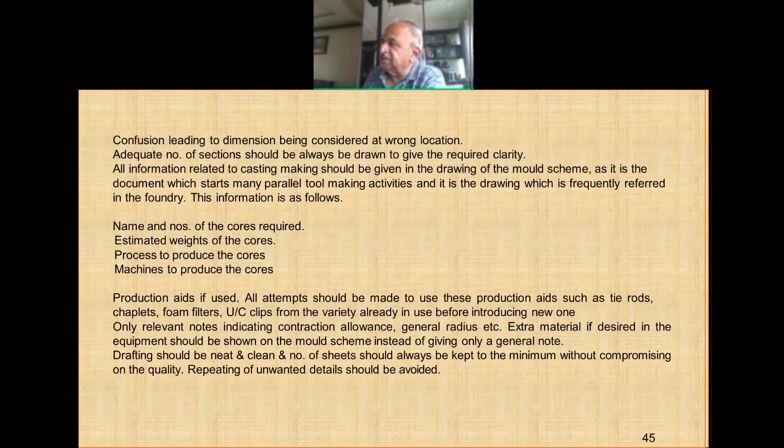All attempts should be made to use these production aids, such as tie rod chaplets, foam filters, U clips, C clips, from the variety already in use.

Only relevant notes indicating contraction, general radius, etc. Extra material, if desired in the equipment, should be shown on the mold scheme instead of giving only a general note. Drafting should be neat and clean.

So these are general age-old guidelines which are being followed, or have been followed, by good people over the ages.

Understanding of the customer's initial machining operations is required, as it has a large influence on the parting line. Overdraft selection, I discussed this earlier.

So, hence machine shop rejection. The system of initial reference points has evolved over the years, and this evolution can be classified into following stages. This is just to give an idea to those who have not seen the earlier machining practices. I have seen companies where averaging and then generating the initial machining reference is done manually.

Generating machine references with fixed reference, second is generating machine references from fixed references from the cast surface, but done at the foundry end, that is averaging. Directly machining the casting using cast surfaces. Customers' machining setup can be at any of these stages depending on quality of available castings.

As most customers have 3 to 4 casting suppliers for their major castings, the practice needs to be common for all of them. There is no point suggesting something when 3 other suppliers are suggesting as per the old practice. The first 3 stages require additional effort from the foundry so that the casting is ready to be machined in the customer setup. But this also ensures that the casting dimensionally qualifies for the customer's needs if proper sighting fixtures are used.

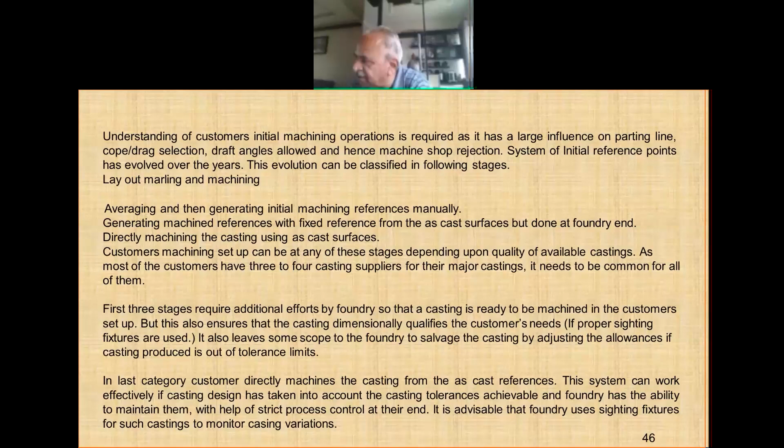I'll rush it fast to just mention the major points. Gating and venting system general considerations.

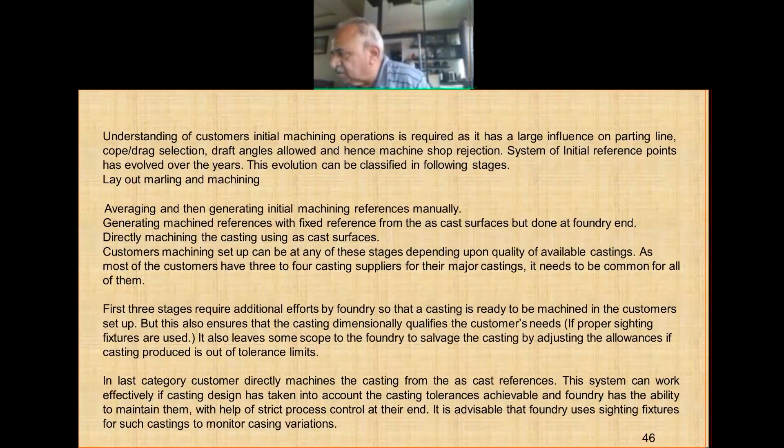I think this was discussed in detail by Janamurthy. Method of gating calculations - I'll just briefly go through it, not the formulas, just the concept.

The metal is accumulated in the pouring basin at the top, and from there that becomes the height, and the potential energy of metal gets converted into kinetic energy. So this height energy gives rise to a velocity at the parting line, which should not exceed 80 millimeters per second, as I said - difficult to achieve, but should be made to do that.

So based on the quality of the metal, the composition of the metal, and the temperature, the fluidity factor is decided. The fluidity factor, the parting line velocity, and the casting volume will give you the area of the ingate to fill the mold in the required pouring time. So first you calculate and arrive at the pouring time. My book on pattern design gives all those calculations and more theory on this.

So first we decide the pouring time - what is the optimum pouring time for a given wall thickness of the casting, given weight of the casting, given composition of the metal. This pouring time and the parting line velocity will decide the area of the ingate. That becomes the entry area of the gating system.

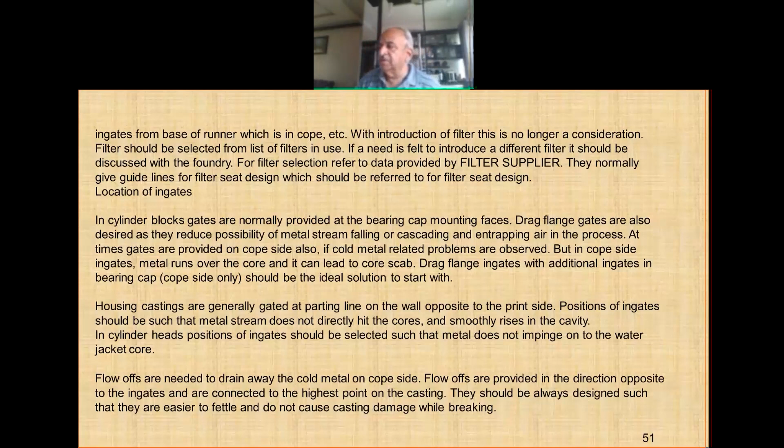Cold metal related problems are observed, but with cope side ingates, metal runs over the core and it can lead to core scab. Drag flange ingates with additional ingates in the bearing cap, cope side only, should be the ideal solution to start with. Housing castings are generally gated at the parting line on the wall opposite the print side.

Positions of ingate should be such that the metal stream does not directly hit the cores and smoothly rises in the cavity. For cylinder heads, position of ingate should be selected such that metal does not impinge on the water jacket core.

Flow offs are needed to drain away the cold metal on the cope side. Flow offs are provided in the direction opposite to the ingates and are connected to the highest point in the casting. They should always be designed such that they are easier to fettle and do not cause casting damage while breaking.

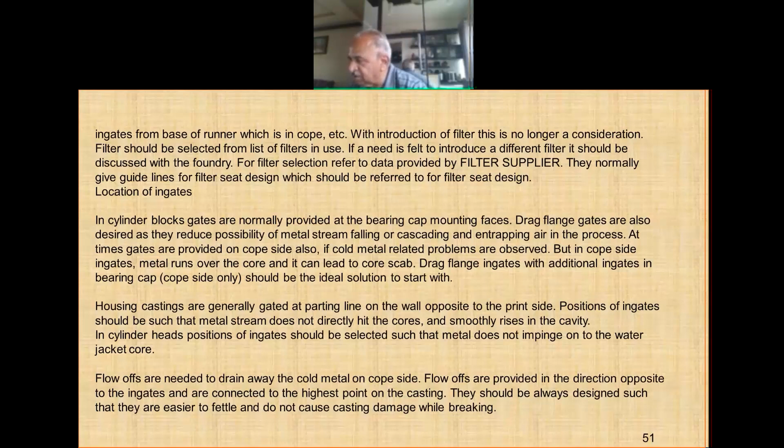Vents are of two types: gas vents and metal vents. All vents which carry the core gases, generated during burning of core binders, are called gas vents. As a rule, they should open to the atmosphere, at the height of the mold from the parting line. These vents are fitted on core prints, and metal is not supposed to enter into this vent. Effectiveness of these vents depends on print clearances.

Whenever shell cores are used, gas venting becomes critical. Shell cores need to be drilled to make a passage for the internal gases of the cores. These passages are then connected to the gas vents.

Metal vents are meant to carry out the air inside the mold as the metal enters the cavity. Not all metal vents need to be open to the atmosphere. Only two vents should be open up to the top of the mold height, which gives an indication to the pourer that the mold is filled up. The rest of the vents should not exceed a height to diameter ratio of 10.

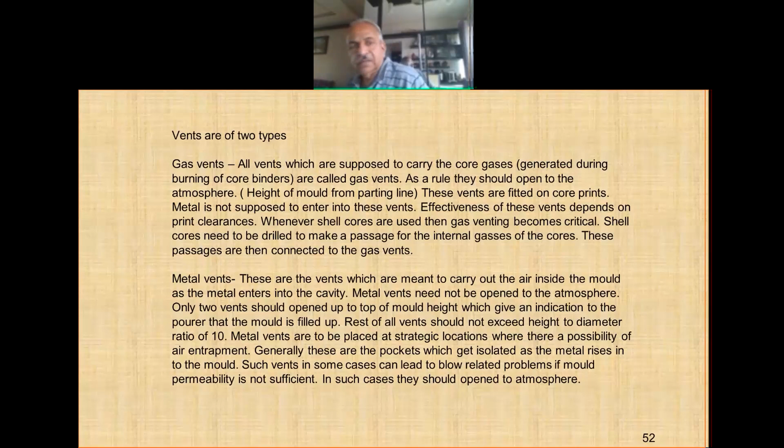Feather vents can be provided, but after consultations with the foundry, pattern construction should be kept in mind under impact while molding. These vents are very thin feathers and may not stand the high pressure molding operations.

Use of guide bars on pattern plate - this is a very unique idea that we got. Whenever I used to attend meetings in different foundries, they always used to discuss mold breakage.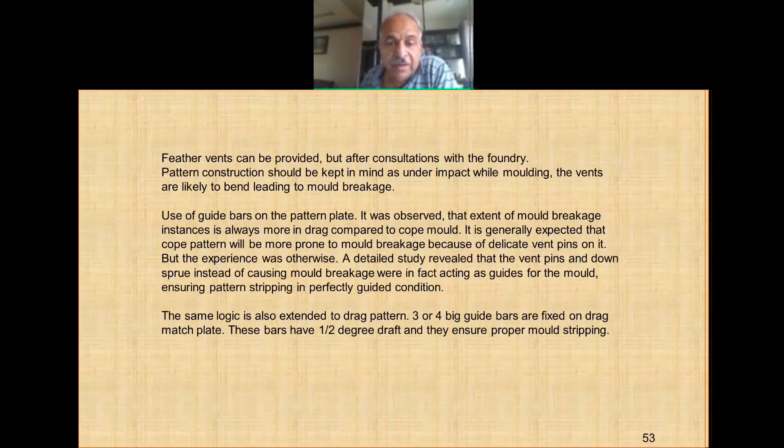The mold breakage, to my surprise and everybody's surprise, was more in drag than in cope. In cope, we find so many thin vent pins, runner bars, the down sprue and all that. In spite of that, the mold breakage percentage was less in cope. That gave us an idea that the vents, instead of breaking the molds, are helping the mold stripping arrangement to properly separate the mold and pattern. So we introduced similar vent bars in drag mold, which reduced the mold breakage in drag also.

Modern trends in foundry - we are coming to the end, so let me go through it quickly. Modern trends include making all cores needed per mold in one shot of the core box, so that product change or setup change is much easier, and all machines are employed for the same time.

Candleless core making, horizontal versus vertical core shooters - we can discuss this separately, but horizontal core shooters provide larger flexibility in making cores, so they can make much more delicate cores than what the vertically parted core shooter can.

Modern tooling inspection techniques, key core concept - many people must have seen it, one or two foundries are using this. We make the cores first, then put them in another core box and blow the sand into the key passage. Then it becomes a single core.

These are the modern trends. Over the years, unavailability of trained manpower in foundry has forced process planners to rely more and more on automation. It reduces focus on man, but also makes repetitive actions error-free.

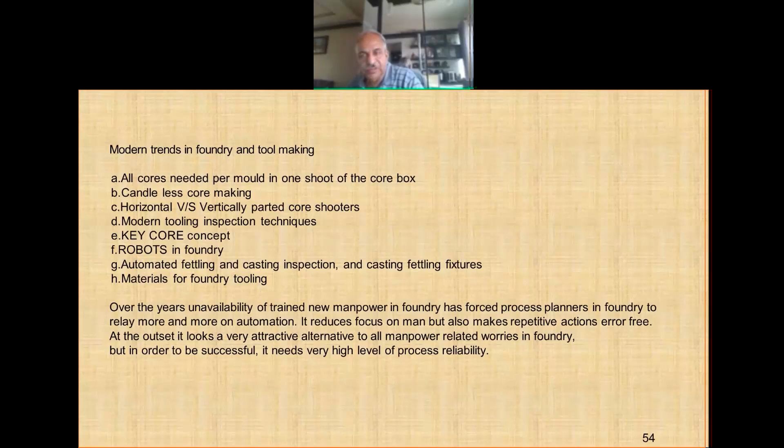At the outset, it looks like a very attractive alternative to all manpower-related worries in foundry, but in order to be successful, it needs a very high level of process reliability. This needs extremely robust methoding as well as tool design, and very good, reliable quality foundry materials such as sand, resins, paints, etc.

Thinking of all the aspects of casting making well in advance before the tool is ordered is a must if one is going for a high level of automation. Overall and thorough knowledge is the key to successful implementation of these high productivity, high cost solutions.

Incorrect selection of raw material and incorrect process design can lead to underperformance of these high investment, high running cost machines. It can lead to a disastrous situation leading to spiraling losses. Since all these efforts are directed to eliminate the human element from repetitive operations in foundry, the first thing that gets focus in this case is tooling.

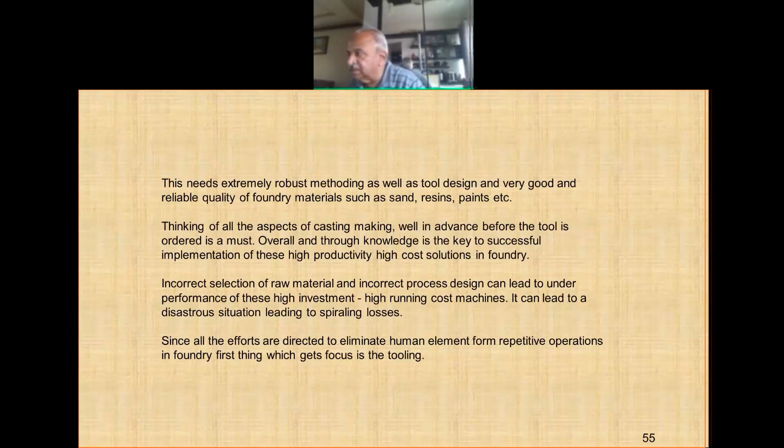The core box layout is extremely important. It has to take into account the core assembly sequence. No matter what care is taken in core box manufacturing, there will be some core fin present in the parting line which is trimmed. In traditional core shooters, this operation is done by hand.

In these new high productivity machines, the trimming operation is generally integrated into the core box itself. It is called a trim tool. The cores are made and trimmed in the same core shooter. This trim tool can trim with a shearing action, fin at the plain parting line.

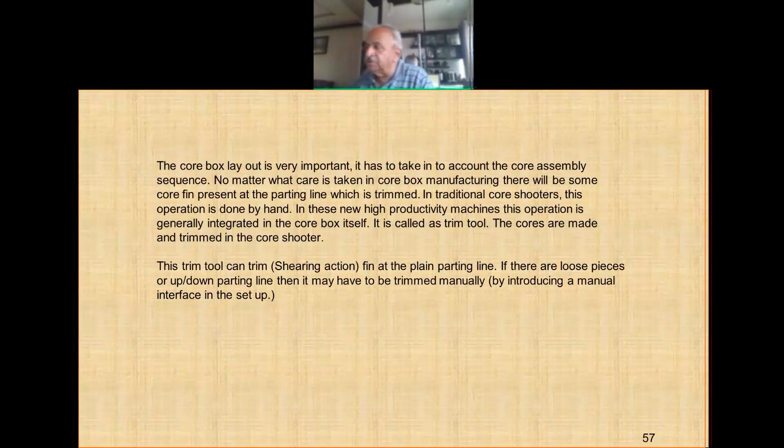If there are loose pieces or up-down parting lines, then it may have to be trimmed manually by introducing a manual interface in the automated setup, like at the parting line fin, blow tips, or blow candle. This is all talking about the modern foundry setup where highly automated core shooters are installed.

Like the parting line fin, blow tips or blow candles also need to be cut from the core and trimmed to the core profile. In advanced core shooters, which are generally horizontally parted because of their high productivity, the machine design allows making of the core without a shooting candle. A simple way to achieve this is to bring the shooting point as close to the core surface as possible and shoot.

When the shooting is over, the blow plate having shooting nozzles retracts and then the top ejector plate comes in. The top ejector plate, housed in the gassing hood, serves a dual purpose. Ejector pins are set such that no loose sand is left; the loose sand left after the shooting nozzles retract is pressed to the required dimension by the tip of the ejector pin itself. Gassing and purging operations take place in the position of the ejector pins.

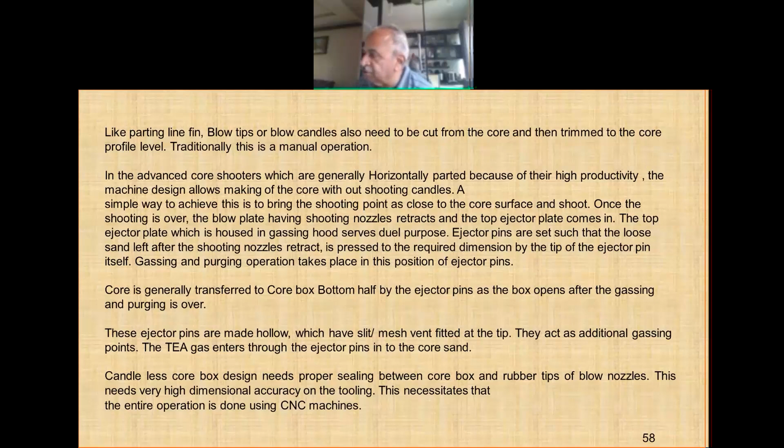While designing tooling for high pressure molding lines and high automation machines, it is strongly advised that 3D models of the machine elements coming in contact with the core box are prepared at their respective locations and checked with the core box model from a fouling, loading, unloading point of view. These core boxes are very big, and stamping of core box weight on the core box and its parts is desired. Blow nozzle and ejector pin lengths also change as per their location on the core, and these lengths should be stamped on the base of each element to avoid confusion and maintenance issues.

Now let us talk about modern tooling inspection techniques. As CNC technology entered the manufacturing industry in the late 90s, inspection by the old height gauge and vernier calipers became more and more tedious and less adequate. At the same time, coordinate measuring machines also became more available and affordable.

Portable CMMs such as FaroArm became available. These new inspection machines, along with software, can compare a 3D model of the pattern, core box, or casting and give the extent of deviations. Most portable CMMs can measure up to an accuracy of 50 to 60 microns, which is sufficient for pattern, equipment, and casting inspection.

Portable CMMs can be touch type or scanner type. Touch type machines give point-to-point comparison between a CAD model and an actual tool. This is sufficient for tool inspection.

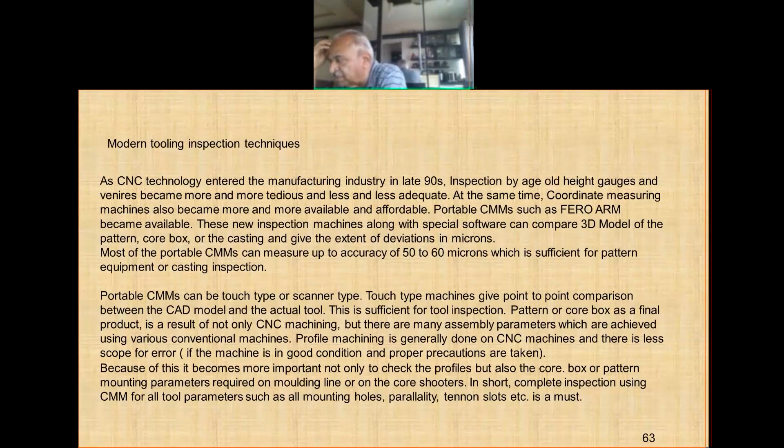A pattern or core box as a final product is a result of not only CNC machining, but also many assembly parameters achieved using various conventional machines. Profile machining is generally done on CNC machines, and there is less scope for error if the machine is in good condition and proper precautions are taken. Because of this, it becomes more important not only to check the profile but also the core box pattern and the mounting parameters required on the molding line or on core shooters. In short, complete inspection using CMM for all tool parameters such as mounting holes, parallelity, tenon slots, etc. is a must.

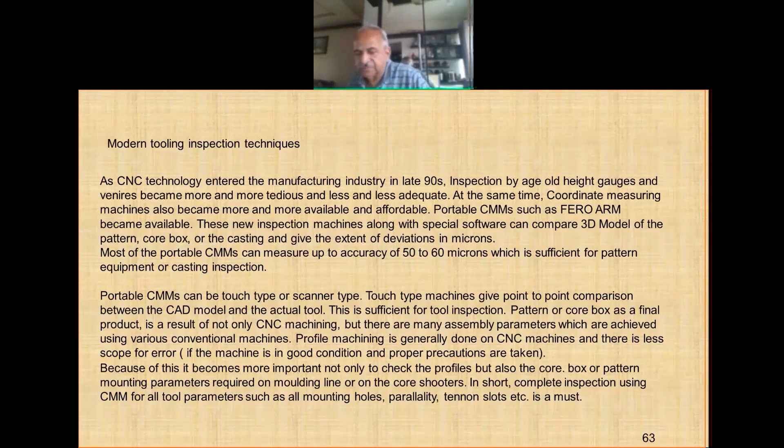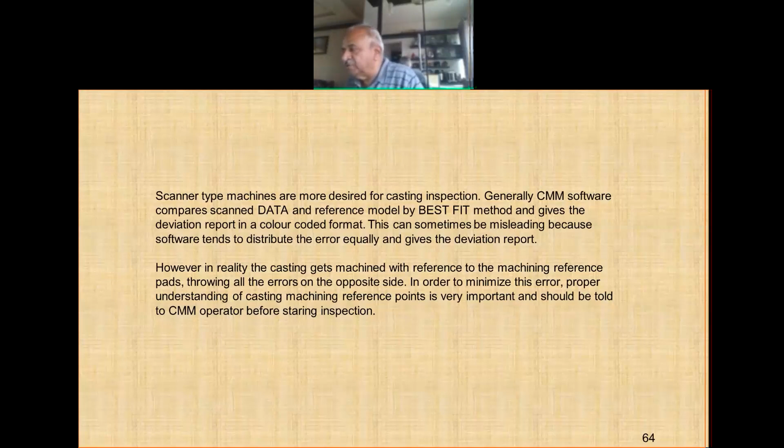Scanner type machines are more desired for casting inspection. Generally, CMM software compares scan data and the reference model by the best fit method and gives the deviation report in a color-coded format. This can sometimes be misleading because the software tends to distribute the error equally. However, in reality, castings get machined with reference to the machining reference pads, throwing the error to the opposite side. To minimize this error, proper understanding of the casting machining reference point is very important and should be communicated to the CMM operator before going for CMM inspection.

We discussed about the tooling material, so I will not repeat that. Somebody asked about core box cleaning last time.

So let me spend a few minutes on that. Best way for a healthy and trouble-free life is a good hygienic standard and cleanliness for human as well as for foundry tool. This is true for foundry tooling also.

After every run of the core box, it should be cleaned thoroughly and checked for basic parameters such as parting line gaps and right angles, wherever required. The equipment to do this is not really important, but the focus on this is important. A glass bead blasting machine is an excellent tool to clean the core boxes.

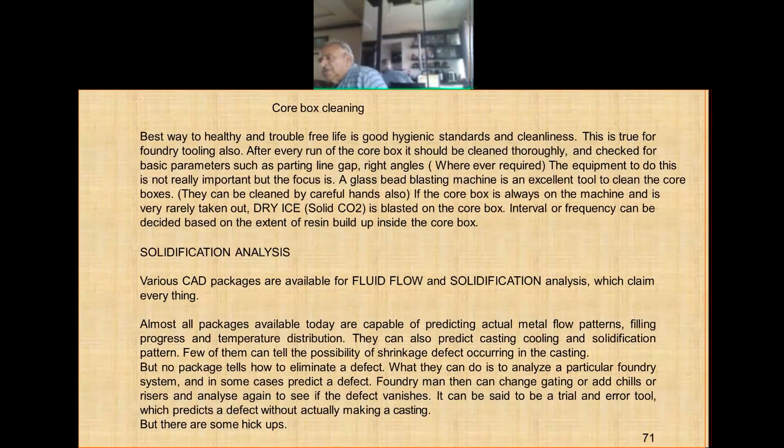They can be cleaned carefully by hand also, of course. If the core box is always on the machine and very rarely taken out, dry ice or solid CO2 is blasted on the core box. The interval or frequency can be decided based on the extent of resin buildup inside the core box.

We'll spend some time on solidification analysis because even today the customers have started insisting on solidification analysis. Various CAD packages are available for fluid flow as well as solidification analysis, which claim everything. Almost all packages today are capable of predicting actual metal flow patterns, filling progress, and temperature distribution.

They can also predict casting cooling and solidification pattern. A few of them can tell the possibility of shrinkage defect occurring in the casting. But no package tells you how to eliminate a defect. What they can do is analyze a particular foundry system and in some cases predict a defect.

The foundryman then can change the gating or add chills or risers, and analyze again to see if the defect vanishes. It can be said to be a trial and error tool which predicts a defect without actually making a casting. But there are some hiccups.

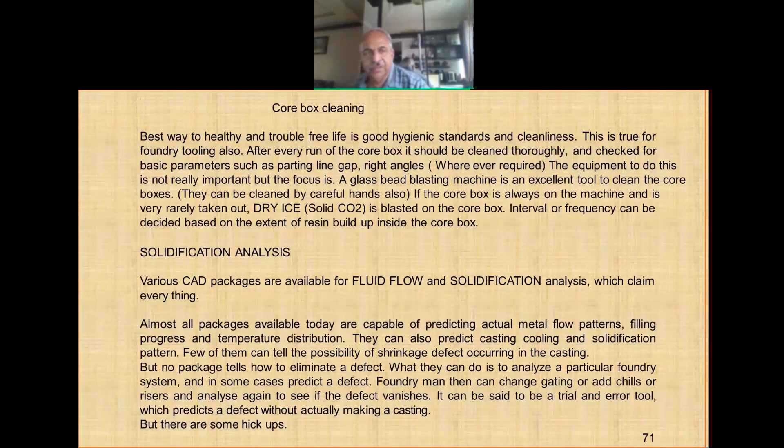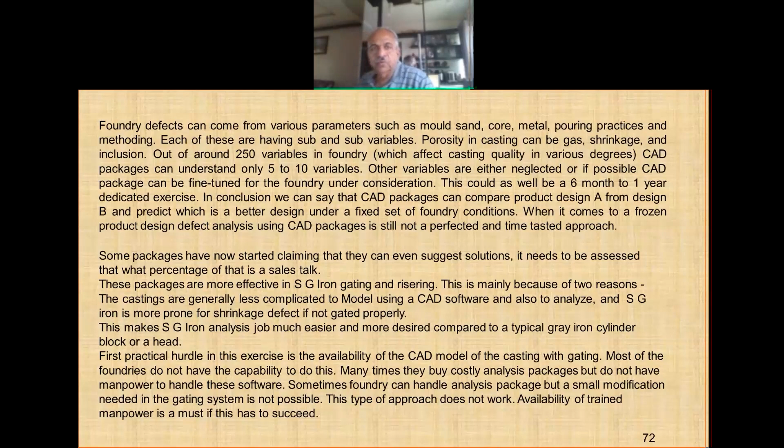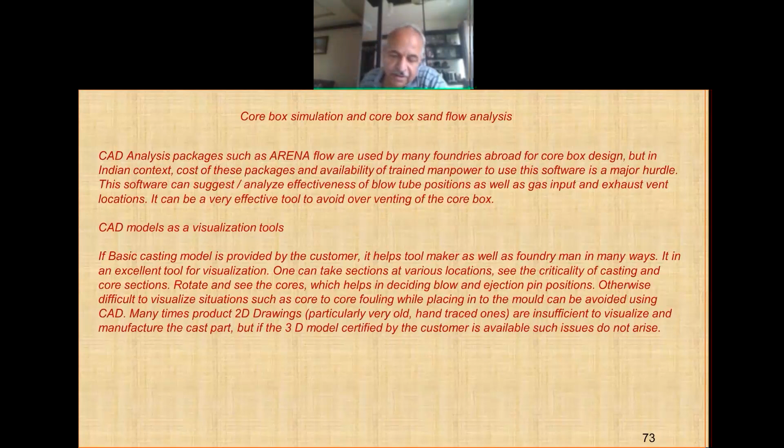Sir, there is one request from Mr. Mohit Kumar Sharma to please explain the candleless core making concept.

Candle is the unwanted part of the core. So when you have a blow plate or blow nozzle resting at the top of the core box, the distance from core profile to the core box top comes as a candle. That is called a candle, in cold box or in shell.

If you have a larger downward stroke for your blow head or shoot head, then you provide a shooting point right on the surface of the core so that the shooting nozzle enters inside the core box. Many machines, like Indian machines, are also capable of movement of the top ejector plate to the extent of 120-130 millimeters. So to that extent, the blow tube can enter into the core box and blow the sand right at that point. That produces the candleless core.

This is generally true for horizontal core shooters, but modern core shooters for vertical parting also, like Loramendi, are having such designs. Thank you, sir.